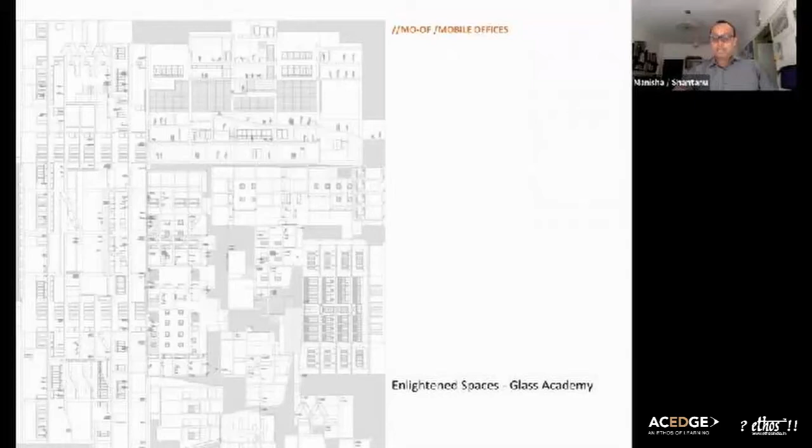Good afternoon. Today we are celebrating World Family Literacy Day, and we're going to discuss a project of ours called the School of Planning and Architecture at Vijayawada.

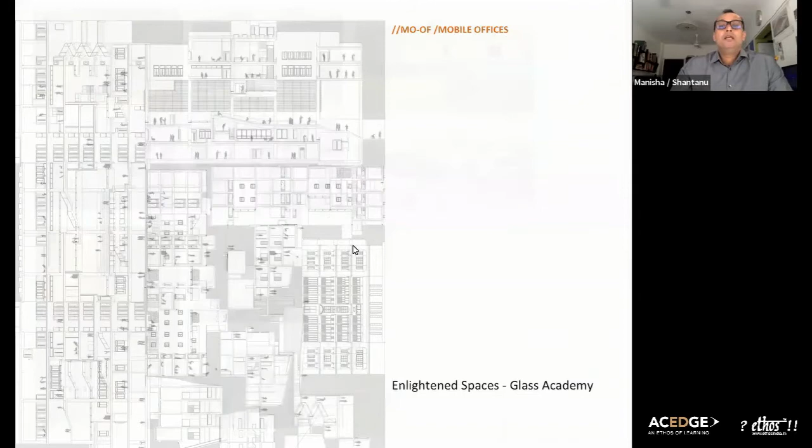So I'll run through some of my slides. It's more about the influences that we had in the beginning of our career, and these influences were mostly from the schools we studied in and the colleges we studied at.

Manisha and me both studied at CEPT. Manisha then went to Bezalel for an exchange program in Jerusalem, pursued a master's at Cornell University, and now teaches at Kamla Raheja. I studied at CEPT, then did my master's at the Architectural Association in London, and I also teach at Kamla Raheja now.

So these are the 3-4 schools that we have been influenced by. We were looking at the positive things we learned there from the environments we engaged with, and we tried to bring those positive things into the campus we designed in Vijayawada.

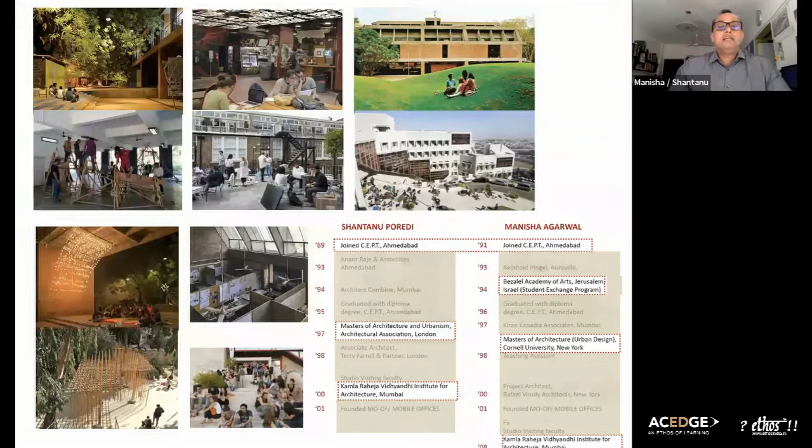The other issues we are interested in - one is working with diverse communities, which is important from the perspective of social sustainability. The other aspect was the environment and the climate. These two coming together are the keystones of our practice currently, and you will see issues like this in this project too.

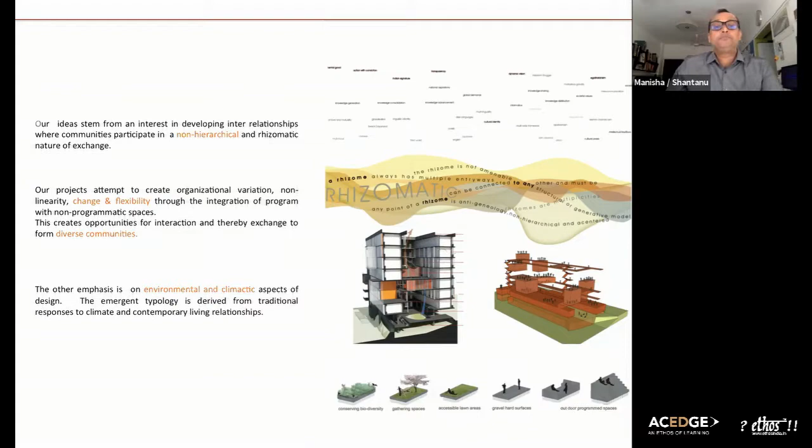So the site itself is in Vijayawada. Can I stop here? There's a wasp again in the office. I'm sorry.

So the context is Vijayawada. It is on the coastal region here, and it's very hot and humid here. So when we worked on this competition, we were very interested in understanding the climate of Vijayawada.

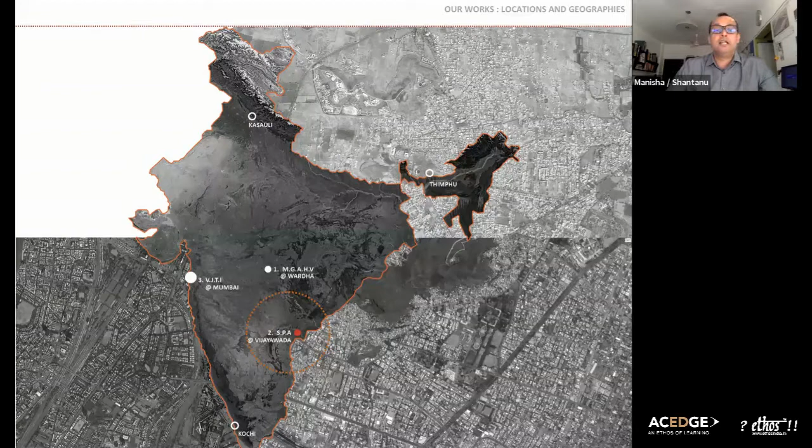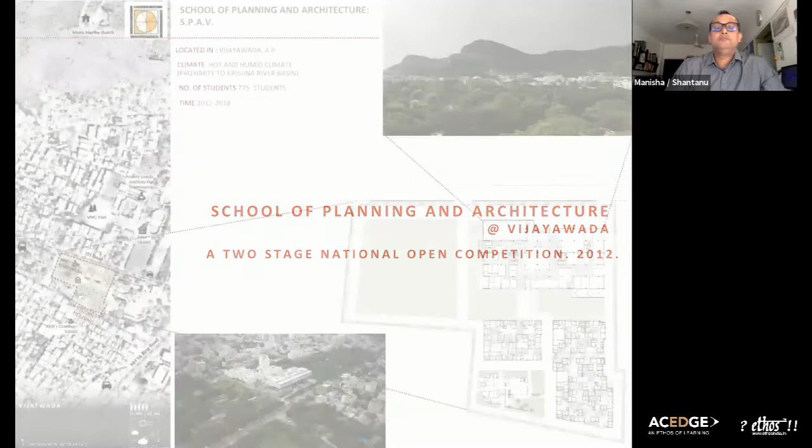This was a 2-stage competition that we won in 2012. This is the kind of site plan that you have - it's a 10-acre site. The image on top is the Gunadala Hills, which is the context, and we were trying to capture these views because they're beautiful hills. At the bottom you see an aerial view of the site itself.

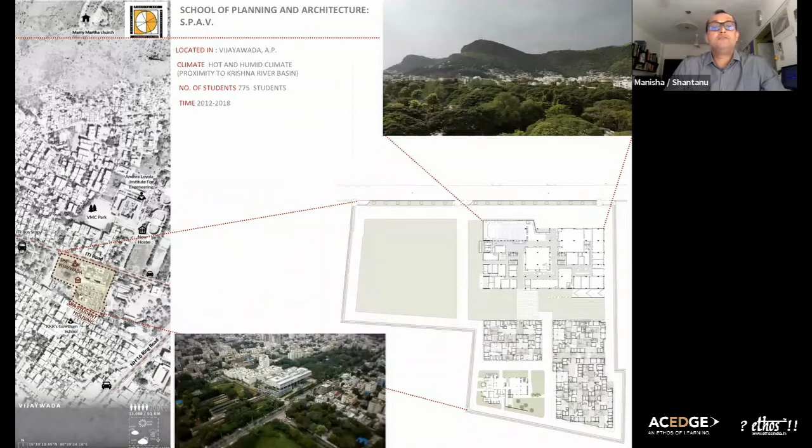On this 10-acre campus, we wanted to build only on 7 because we wanted 3 acres left for recreational areas like sports, so students have open space. Building on a 7-acre site with more than 500,000 square feet of built-up area means close to 2 FSI - that's a challenge in an institute.

SPAs are institutes of national importance and usually get 50 acres of land, but SPA Vijayawada got only 10, so that was a challenge. If you build at 2 FSI you'd end up going at least 7 to 10 stories, but we wanted to keep the institutional scale at 5 floors and the residential scale at 3 floors, so the density is a little higher but you could still achieve the scales you wanted.

So that's the master plan. You see the ITI road on top - that's where my mouse goes - and you can see the institute right adjacent to it. Incidentally, the ITI road is actually an institutional road; there's an ITI school, a Loyola College, a Ramesh Hospital. So there are various institutes here.

And the residential area behind that is the girls' hostel here and the boys' hostel here, with the dining hall here and the visiting faculty on top of it. So that's the lay of the land - that's the master plan.

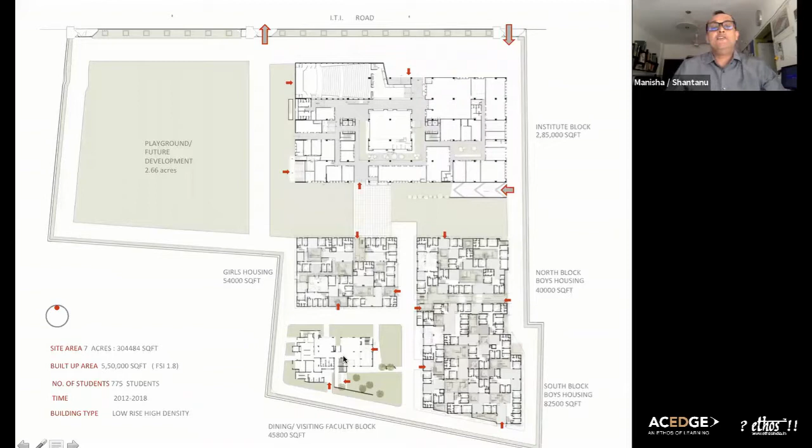Initially, when we went there, we realized a few things. The intent was to create social spaces embedded in its cultural context, along with an environmentally sensitive response, to create a built environment which enables learning and living as a community.

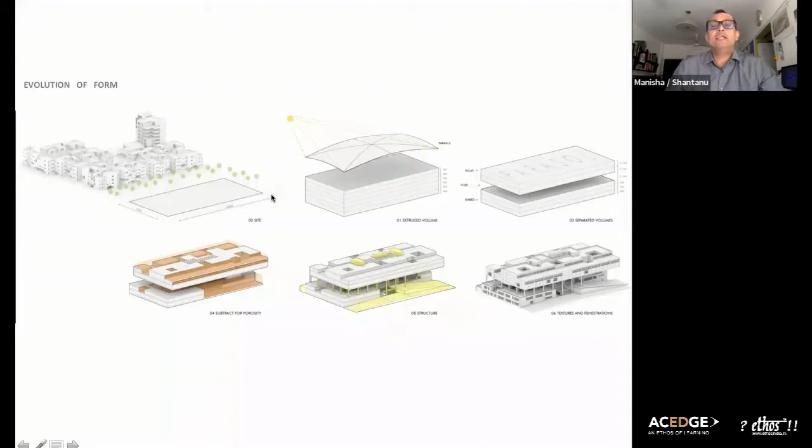That stayed with us, so when we started developing the form of the building, the idea was - the site just for the institute is a 50 by 100 block, like a super block. We were looking at it as a super block, and that's the program stacked all together, with a parasol or an umbrella placed on top of it.

In the next stage, we realized, why do we have an independent parasol? We make the stack itself into a parasol and split the building, and then we added porosity to it.

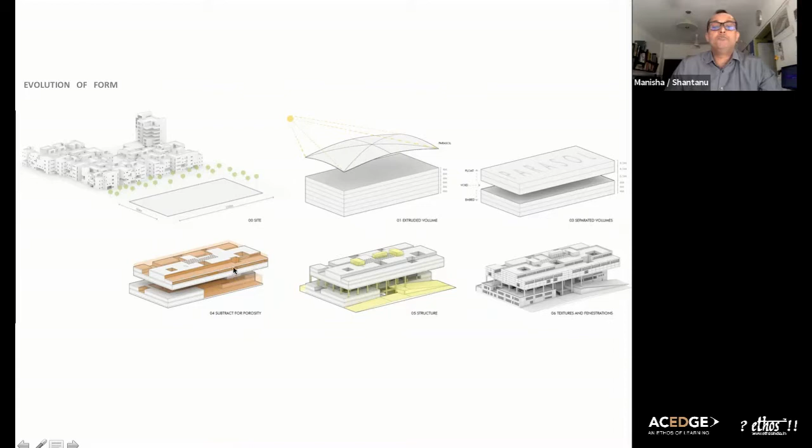We needed winds to move through this porosity, so we added structure and textures, and that was the form.

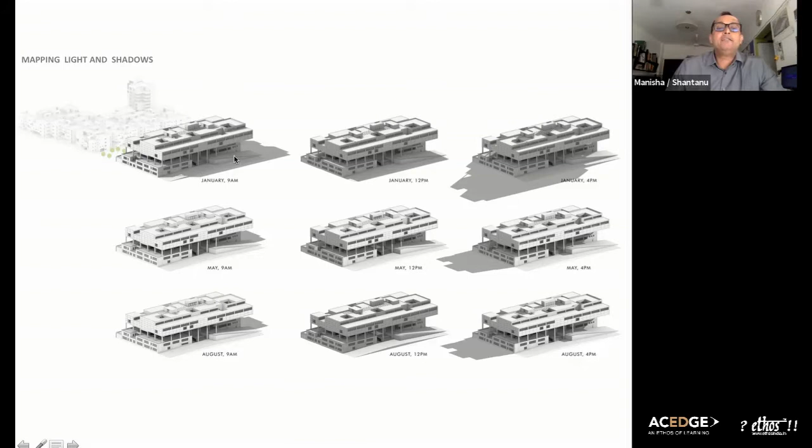This is the next study we did, mapping the light and shadows. The idea is that we wanted students and faculty to take classes or interact in open areas. In Vijayawada, you couldn't really be in the open, you at least needed a roof. So we looked at the shade and shadow of this mass, and where we could infuse program. This was mapped over the year, day and night, morning to night. That's the climatic strategy.

The roof form has been modulated to receive natural north light within the studio. That's the top block we call the parasol. There are high ceilings and voids that enable cross ventilation. This is the south side, that's the north side, and that's why the north lights are here. They always fold to bring in north light.

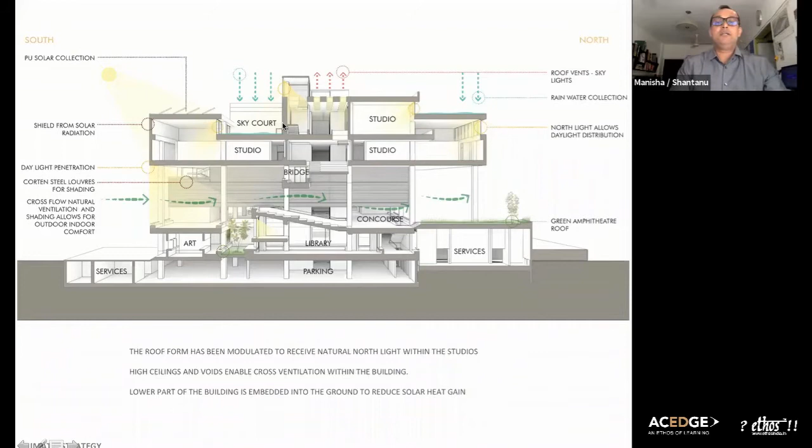The lower part of the building is embedded into the ground to reduce solar heat gain. You can also see green gardens on top of some roofs. That's the climatic strategy. There are smaller elements like solar panels and other strategies, but largely this is the idea for the climate.

If you look at the other sectional strategies, the programming strategies, the studios are on top and the workshops are below, which is generally held in the afternoon. So you go up to the studios in the morning and workshops below.

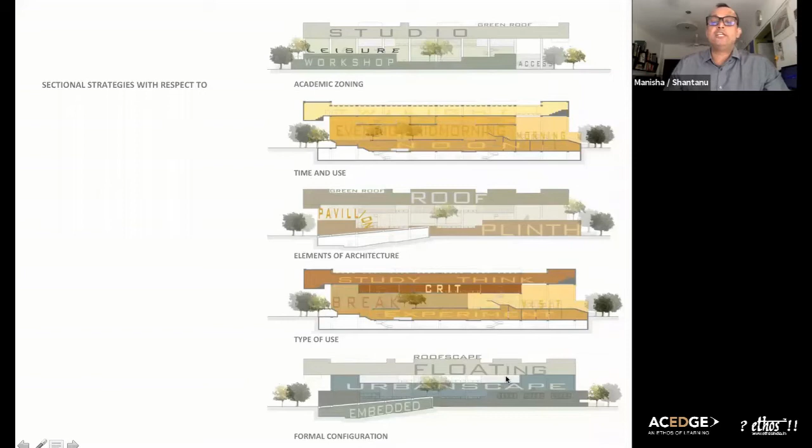Leisure is in between. If you look at the elements of architecture, you have a green roof, a modulated roof, a pavilion in between, a plinth, and the formal configuration of a roofscape, floating, urbanscape, embedded below. Those are the ideas we were working with.

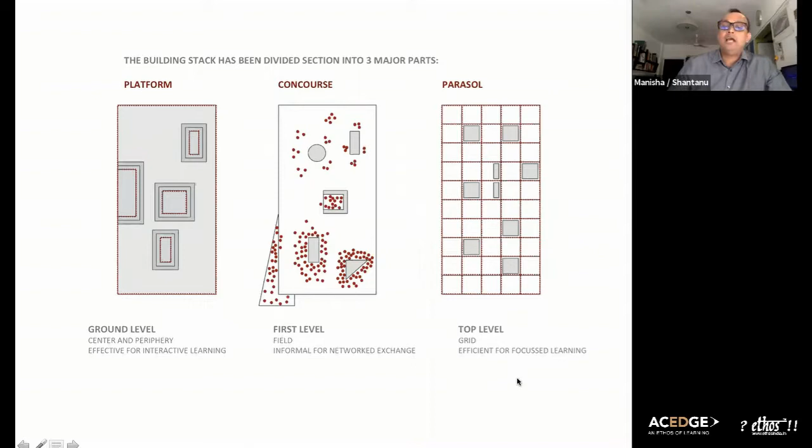The top part, the parasol, is more like a grid, efficient for focused learning. That's how the programs are stacked up. Lower down there's the auditorium, the library, and the exhibition, along which all the workshops have been strung behind. These are the public programs, and also the heavier programs.

You have books, you have heavier elements that you need here. As you go up, you see the concourse, where you have the administration and the general body meeting area. This is important because students congregate here, and it's a space for them—more like talking about their independence, a democratic space—and then the canteen next to it.

As we go above, you have two stacks of faculty offices and two more floors of studios. That's after we add circulation. You see a lot of voids, and the circulation has been added through these voids to connect all these spaces.

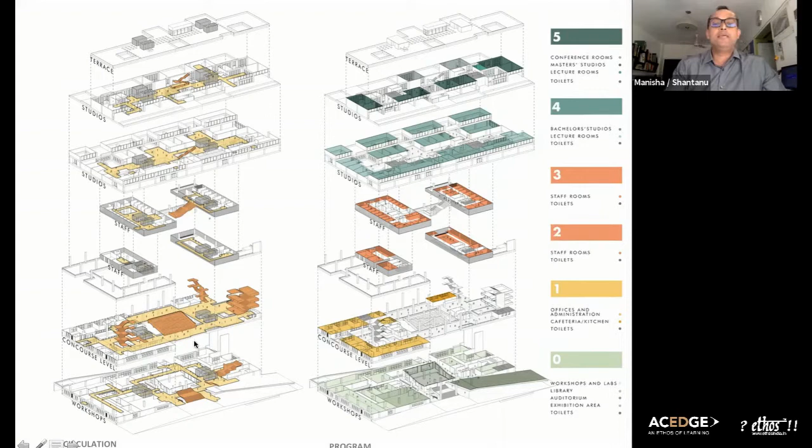And those are the plans. You see the auditorium, which slopes up and comes to the general body area. That's the exhibition, library, auditorium, all the workshops. That's the green garden that brings you up to the general body meeting area, the administration waiting area, administration, canteen here.

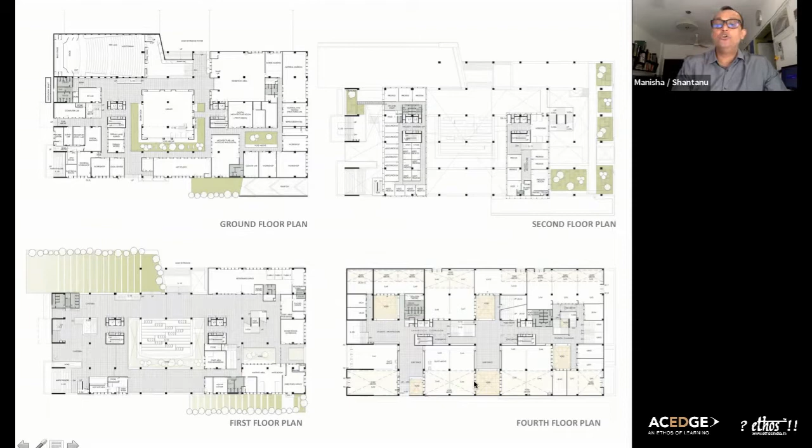Those are the faculty offices. These faculty offices have gardens connected on the eastern side, and they also overlook these spaces. The 4th and 5th floors are the studios—double height, overlooking studios.

That's the section showing the idea of bringing the street gently into the building. That's the general body meeting area with the library below it. That's the building that bridges across, and you can see the same section in the other direction—it kind of forms a gateway in some sense.

There is also a basement with cars, so you don't have cars floating around on the campus. That's an animation that will give you some sense of the variation in section throughout.

So you are seeing these studios that fold up on the roof and allow north light to come in. You can see the auditorium here slowly coming up and now joining the concourse, becoming part of the general body meeting space. The building now bridges across.

You see these small bridges, the large building bridging, now crossing to the other side and coming to the eastern side. So you started at the west, you come to the east with this double helix staircase in the voids,

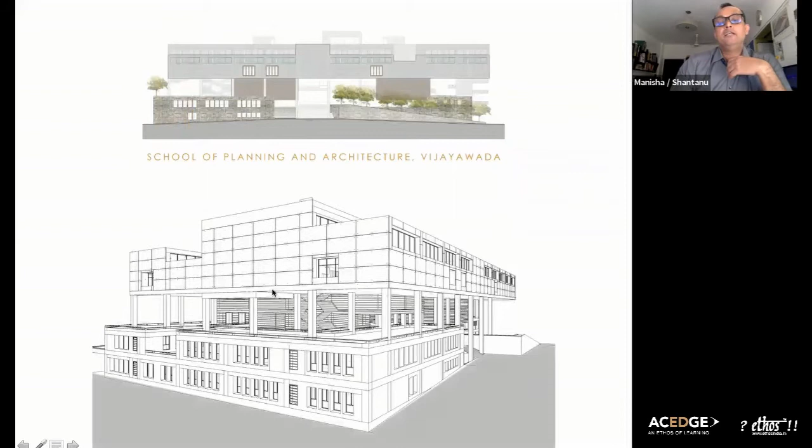and you come to the eastern gardens on top of the concourse. So these are the eastern gardens, and the building has been pushed behind so that you get eastern gardens on the concourse here.

So that's the view, a photograph of the building from the western side. You can see what we're trying to do is very clearly not have any openings on the western side. If there are, they're deep balconies, but no glazing. And you're overlooking galleries that overlook the sports area on the sports side.

These galleries also can see the Gunadala Hills. You can view the Gunadala Hills from here, that's what I showed you in the beginning. And you can see these columns from here. We've taken them away because a large part of the view of Gunadala Hills is from these areas.

So also the idea is you being able to walk right across and come into the concourse. Pedestrians can actually walk over the roof. This is a green roof. And on the eastern side, the building is pushed behind, forming those gardens on the eastern side.

So the materials we're using, again, we've clad this with calibrated Tandur stone. Tandur is very local, very close to this area. Above it's Spartan in that sense, we don't plaster this building. It's fair-face concrete, and you can see only the northern side has been fenestrated to bring in the favorable north light.

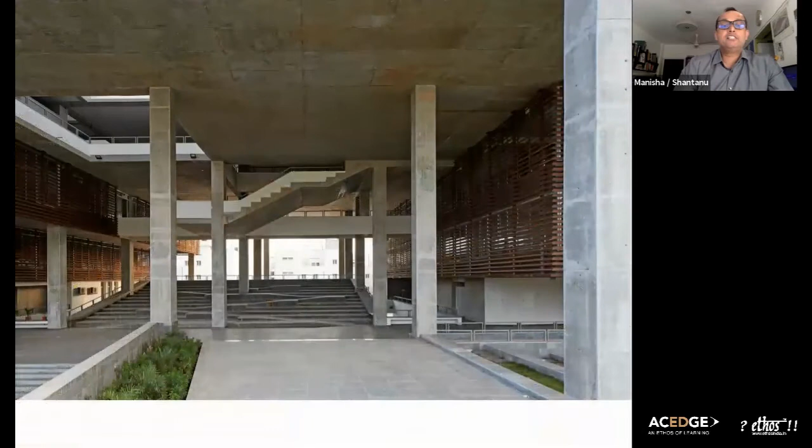That's the central space when you come up either from the right-hand side, which is the auditorium roof, or the entrance from the left-hand side. You come to the general body meeting space.

And you can also see this element that peels down. This is actually a crit space where a lot of the juries happen, in this folded staircase here. It's a large staircase, more like an amphitheater floating up there, and you see these louvers here.

Actually, these are the faculty blocks that overlook this space. So as you go up these blocks, you start connecting with the city, with the landscape across. There are a lot of green trees, tree canopies.

And you can also see the sectional variation of terraces looking into courtyards, and these allow for interconnectivity. So the idea is, although you have these slabs, you're still interconnected. You can see from the ground floor, which is a courtyard with a garden, right up to the 5th floor. So this is always visually kind of interconnected.

And you can see these volumes that create spatial drama here. So that's the Gunadala Hills, you can see them being framed here, and those galleries that you can overlook.

This is a double helix staircase, which is an interesting element because you increase capacity on plan. On the same plan, you have two staircases, one taking off from this side and the other from the other side. It's more an idea that they intertwine, a kind of Escherian element, a playful element, just to increase capacity. So when we drew it, it was very interesting, and we're really happy to see it built the same way.

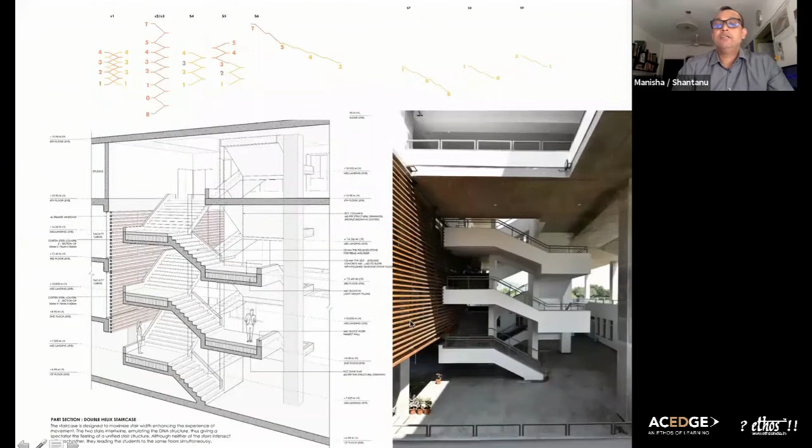There are many staircases in this building, more like a catalog of staircases for students. Single flights, all sorts of dog-legs. So you don't actually need to study staircases through drawings, you have staircases of different types here, and you can study them in your building.

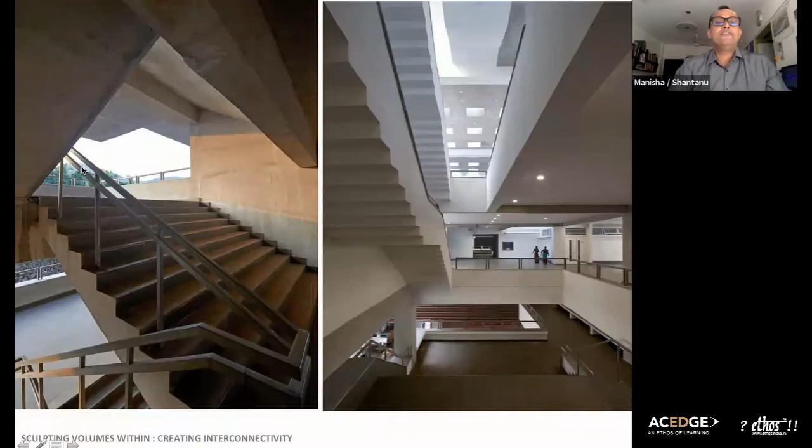And you can see the interconnectivity right through, from the top 5th floor right across to this is the 1st floor, and that's the concourse there. And these galleries that frame the hills, you can see the hills behind there.

Sometimes even a thesis student would want to see what a second year student is doing. Although you finish second year, you can still learn from a second year student. So learning is constant, and you still want to interact with others through this corridor. That's the space it is.

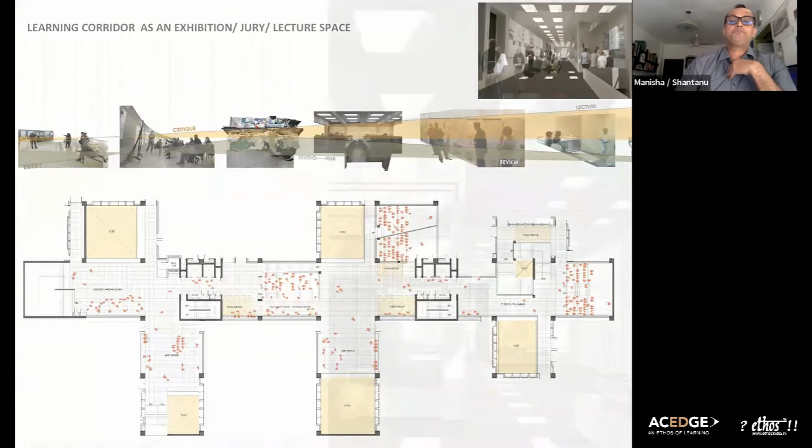You can see it's quite a dynamic space where people pin up and work in areas here. The same corridor brings in light and ventilation through voids. These are the studios inside overlooking spaces where north lights bring light. It's a folded section, so both studios get north light.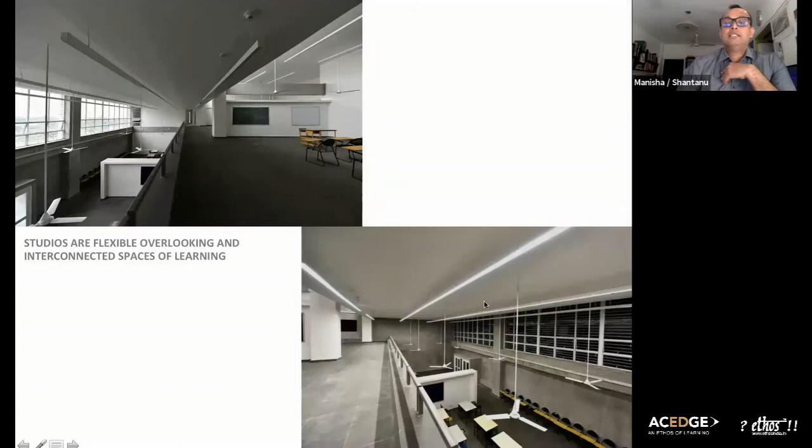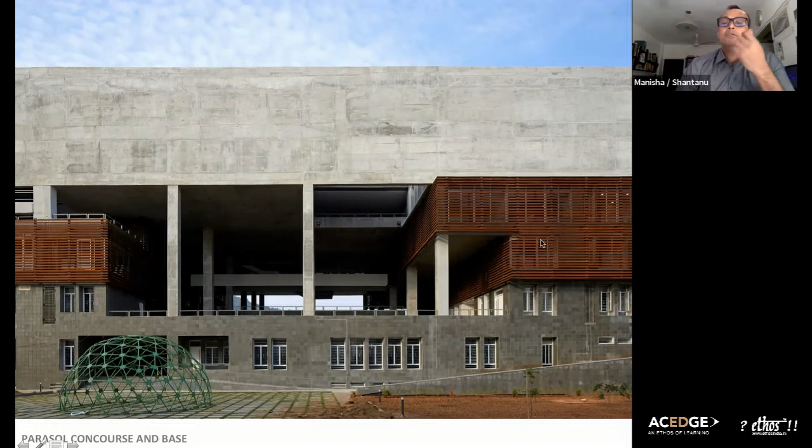We have this corten steel louver, a weathered steel that forms a kind of rusted texture. And the lowest part is the building in stone, the Tandur stone. These are the three main elements used to compose this building with the voids of the building. And those are the drawings, the wall sections where you filter light, you cantilever so you can catch views.

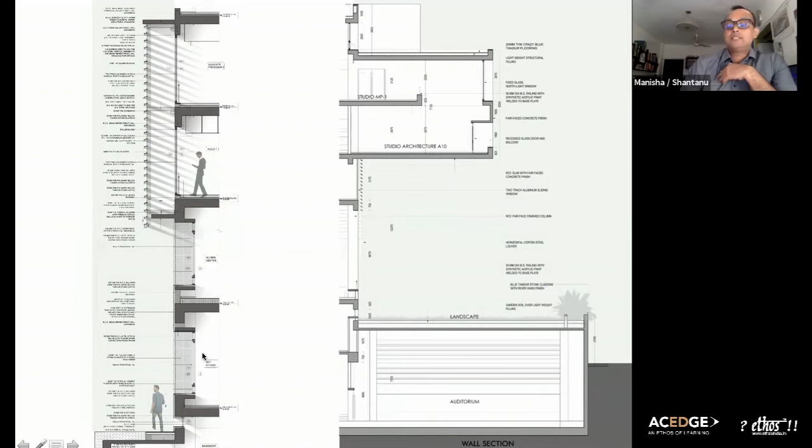Landscape coming into the building over the auditorium. Wherever we had windows, we tried to deep set them in so that the southern light is filtered. So this is on the south side and this is on the north side.

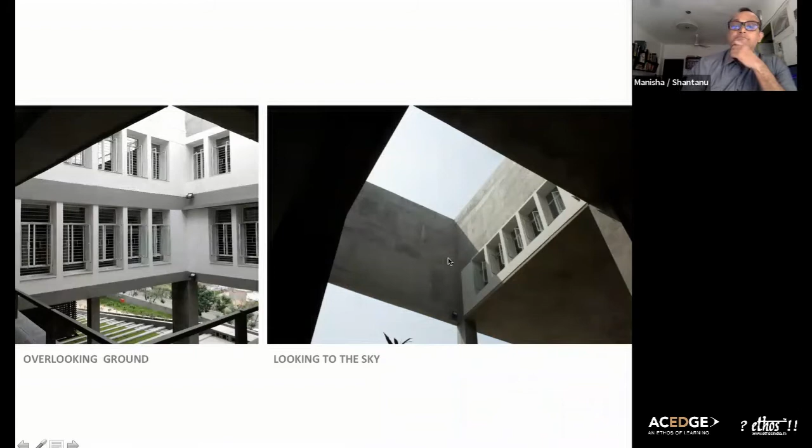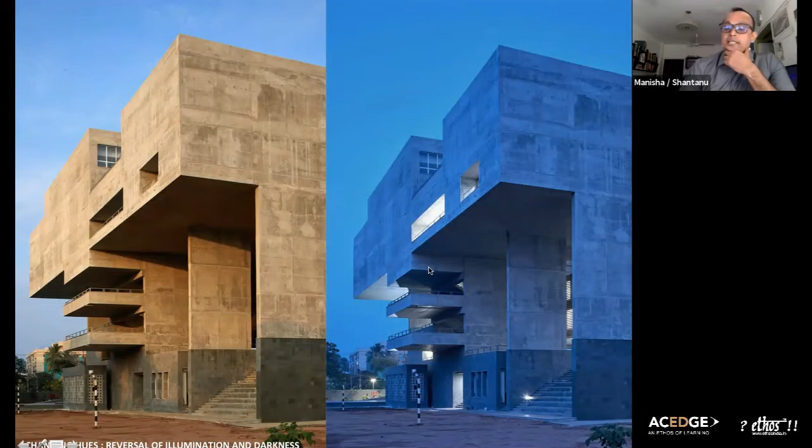Again, overlooking ground from the top and looking at the sky, framing the sky in some sense. And this is the reversal. In the day, you want these deep shadows on the western side. And by the time it's night, the building's been lit now. It will look very different when it's lit up.

You can see across the road now, looking at the building where you can actually walk over this garden to enter this GBM space. So it's very porous. And this whole section is framing the Gunadala Hills and the North Lights.

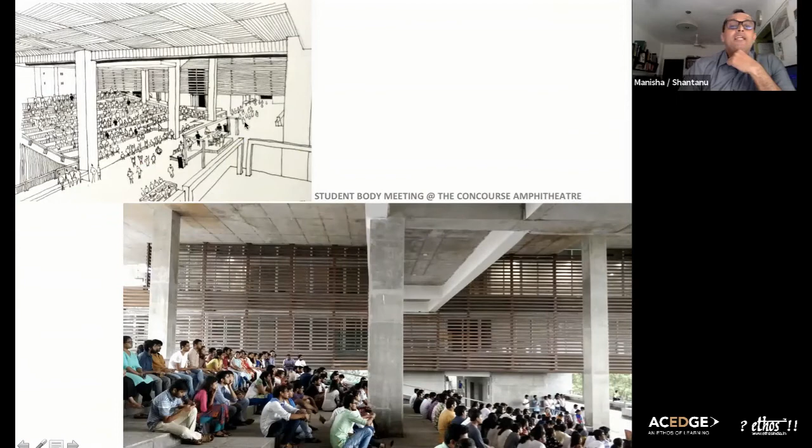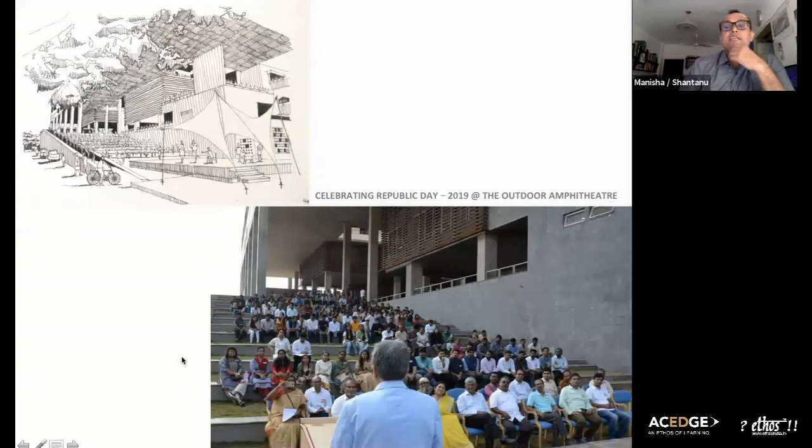Happy students, day of inauguration. They waited for this campus for long. It's happened. And them using the space, the GBM space, some students and faculty have started sketching what is happening with their own sketches, which is really heartening for us to see. That's how they use the space, and that's a sketch by one of the students. This is Republic Day. So all these spaces that we envisaged are being used really actively as outdoor spaces.

So we were working around the idea of courtyards. Predominantly what's different in the DNA of the institute and the housing is that we were working on a 10 meter by 10 meter grid there, and here we are working on a 5 meter by 5 meter grid. So essentially to bring down the scale, we are working on a smaller grid.

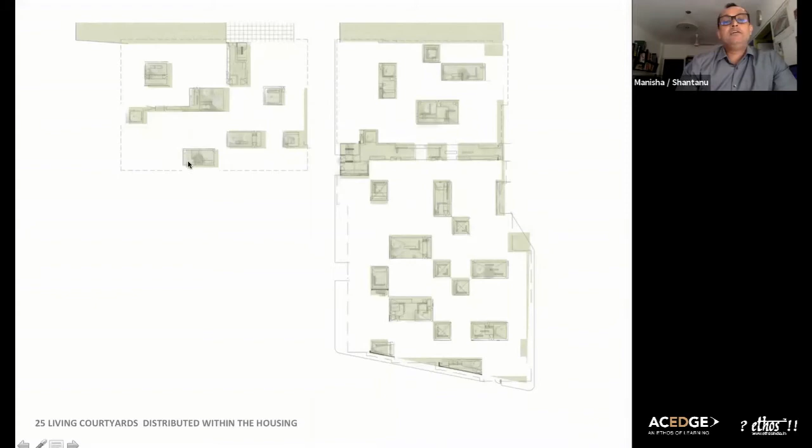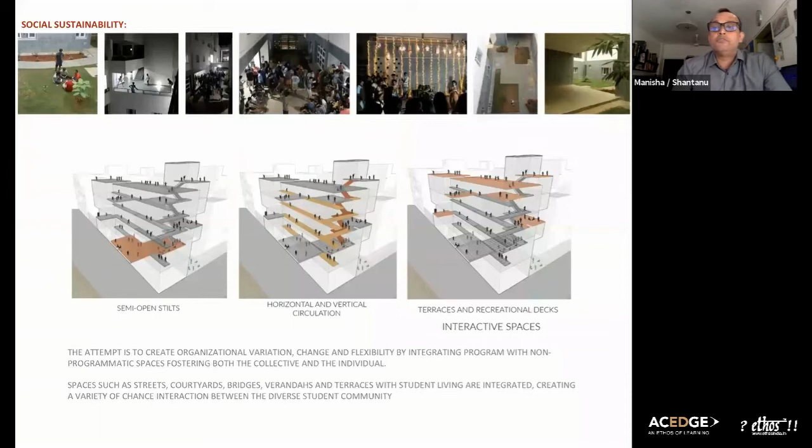But the idea was to use courtyards, either 5 meter by 10 meter, etc. So the module is 5 meters here, and we had 25 courtyards. The attempt was to create organizational variation, change, and flexibility by integrating program with non-programmatic spaces, fostering both the collective and the individual. So this is, in a sense, what we tried to do.

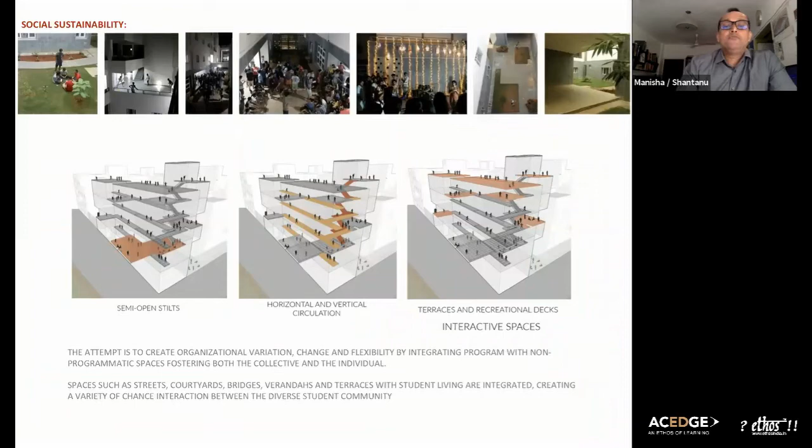Through the process, we were always trying to bring this through, the idea of making bridges, verandas, terraces, streets. Conceptually, that's the section. So you can see below is all the morning spaces or afternoon spaces, day spaces, because they're shaded, and they're also porous, so you can see this textured jali below.

The evening spaces are more these terraces and decks that have been composed or carved into the section so that the evening can be cooler, and those spaces can be used by the time it's night. So students can come out at night on these terraces.

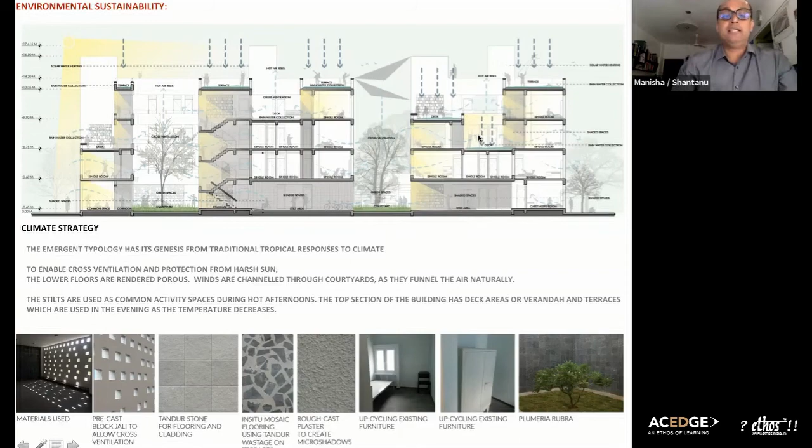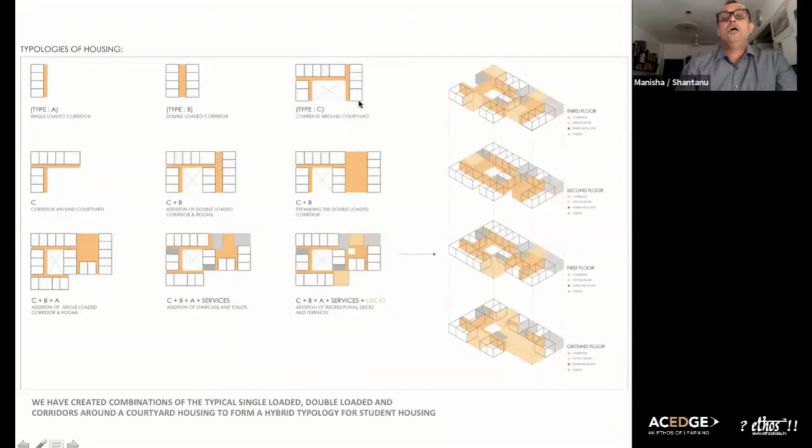In terms of typology, we were trying to create a hybrid, a combination of the single loaded, double loaded, and corridors around the courtyard, bringing them together. And this is an animation that will give you an idea. This is the girls' hostel, carving out the courtyards. Then we run along the courtyard, connect them with a stilt area so there's continuous connectivity. Then connect those courtyards and stilts with vertical circulation, and again with horizontal circulation.

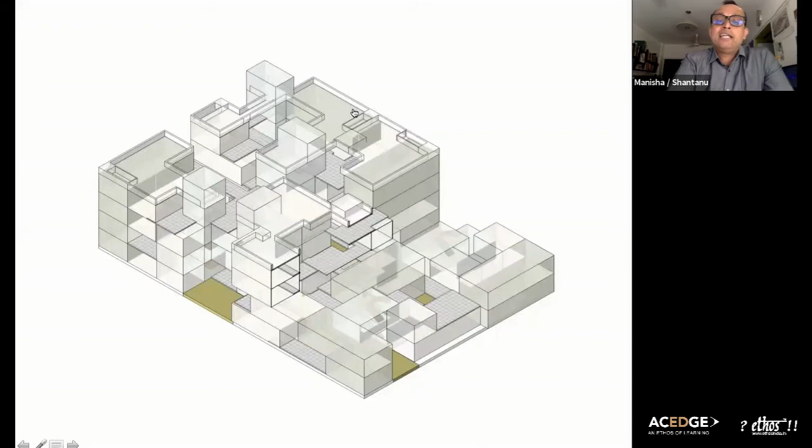So the connection is always at the courtyards, so that people are communicating with each other, interacting with each other. That's the horizontal. And as you come up, you start seeing terraces forming, which create possibilities of personal spaces or smaller scale spaces.

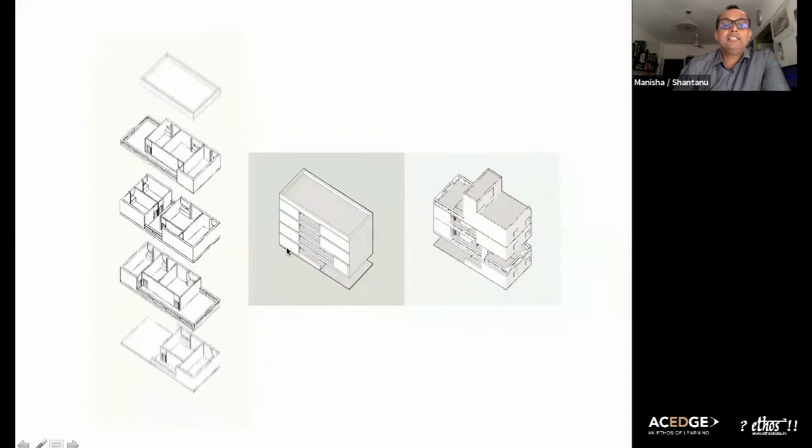DNA again, coming to 3 blocks. Each of these blocks had different kinds of programs. You can see a stilt area, a deck, single and double rooms, a terrace, rooms and toilets, rooms and staircases with the terrace. So these are the 3 DNA blocks that are used, and these come together to form the entire block.

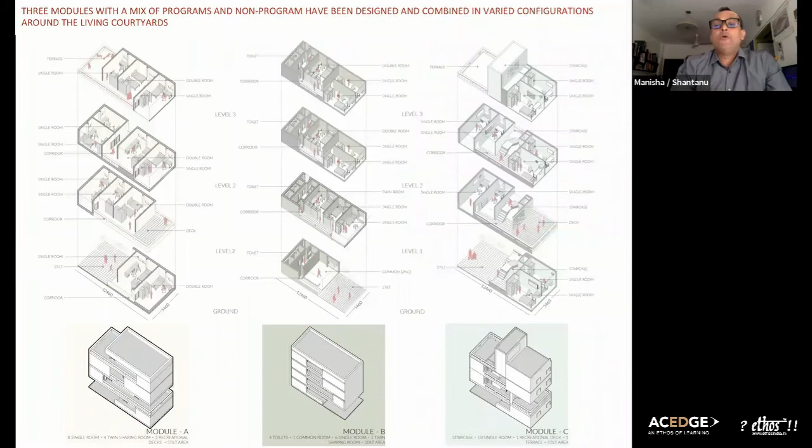These are the 3 modules. You can see clearly that if you use these 3 modules in combination, you get that big block - a larger block with A, B, and C, complete with all the terraces, decks, staircases, corridors. So once you have a DNA block and your courtyards, you just use these blocks and play them around to achieve the kind of spaces you need.

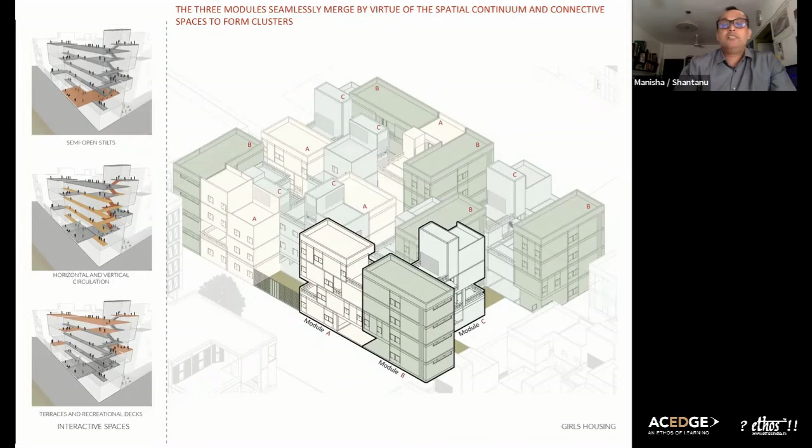So it's more like, how do you cluster spaces? These are the plans. It's modular in some sense - all the single rooms are exactly the same size, the double rooms are exactly the same size, and even the toilets are all modular.

But if you look at it, there is nothing modular about how you move through these spaces. The ground floor is very porous with the courtyards and stilts. The first floor has some decks, denser than ground floor. The second floor is also dense, with few decks and terraces. The third floor has many more terraces, spaces you can use in the evening.

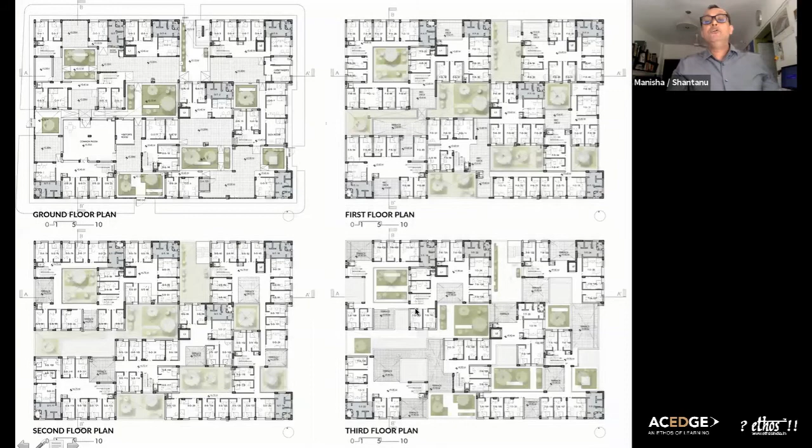Now with the 25 courtyards that you have, each of the elevations - we have 100 elevations of these courtyards - each of these elevations are different. That's because of the strategy we've used, this modular idea and playing with them.

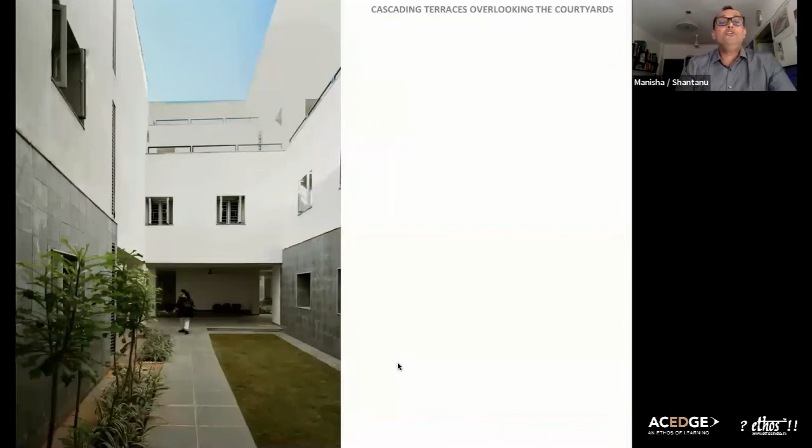And these are courtyards - you can see these stilt areas connecting in transition with the courtyards. You can see cascading terraces connecting with these courtyards visually, and courtyards seamlessly merging with the stilt. Courtyards which create pockets of light and built form, and a labyrinth of interconnected voids.

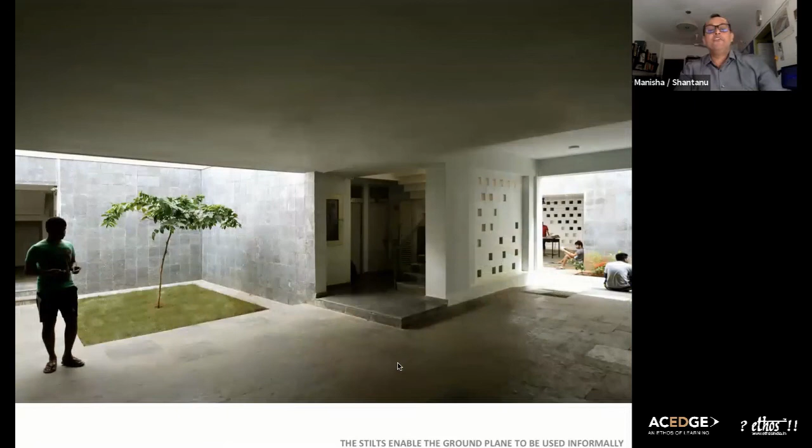This is how students are using them very informally. And this is how you see light and shadow. This is for the cool winds to go through at ground level, where then through the courtyards the hot winds would rise. And the relationship of the terraces, corridors, and courtyards below. These are the decks at the first floor where you see communication across.

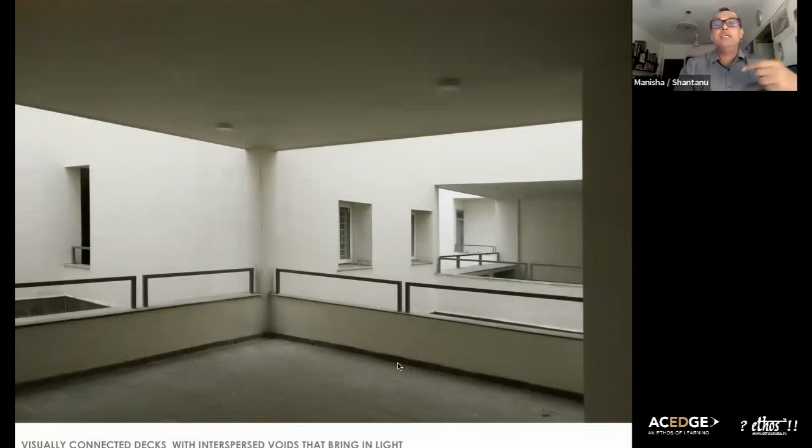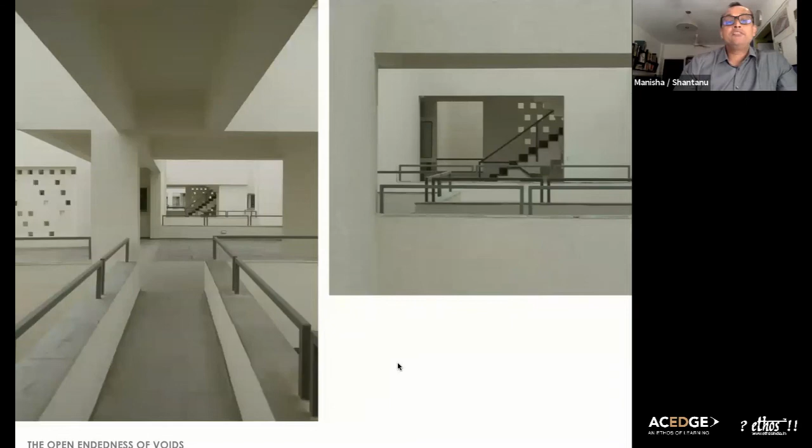This is at the top floor. Now you start seeing interconnectivity, terraces and open spaces. These also create a lot of shadows, so I think the idea is to create shade and shadow. And the open-endedness of these corridors above, framing the sky again.

I hope you enjoyed the presentation.